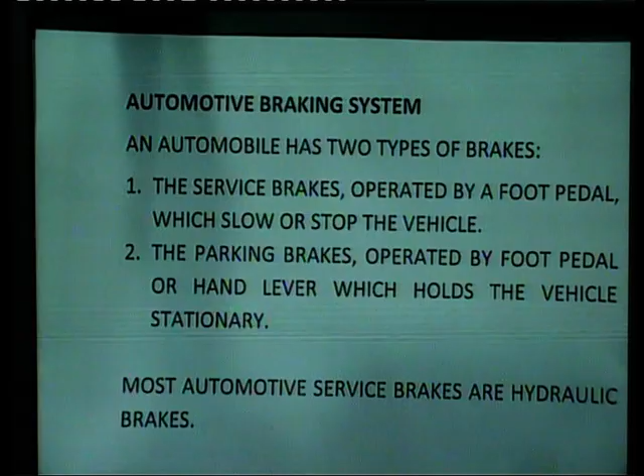Most automotive service brakes are hydraulic brakes. They operate hydraulically by pressure applied through a liquid. The service or foundation brakes on many medium and heavy duty trucks and buses are operated by air pressure, so these are called air brakes.

The hydraulic brake is used on light vehicles, and for heavy vehicles it is air brakes, because liquid is viscous, so it takes time to travel, whereas air under compression behaves like an incompressible liquid. So the air brake is very apt for heavy vehicles.

Now, friction and braking. As you know, friction plays a very vital and important role in braking. If there is no friction, there is no braking. So friction is the resistance to motion between two objects in contact, and it varies with the force applied between the sliding surfaces.

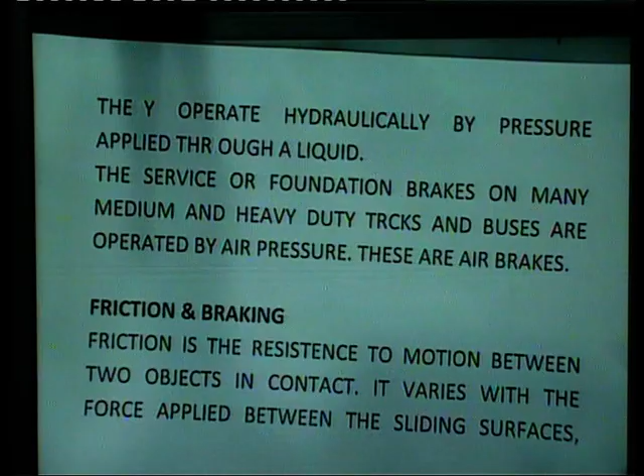The two sliding surfaces mean the brake shoes are stationary, while the brake drum or disc is moving. So the friction between these two is responsible for braking, along with the roughness of the surfaces and the material of which the surfaces are made.

So friction depends on the roughness and the material. The amount of friction also depends on whether a liquid such as oil is between the surfaces to provide lubrication.

Sometimes the brake is leaky, or the hydraulic oil leaks out through the wheel cylinder, and the brake shoes get wet. This liquid acts as a lubricant, which decreases friction and hence braking.

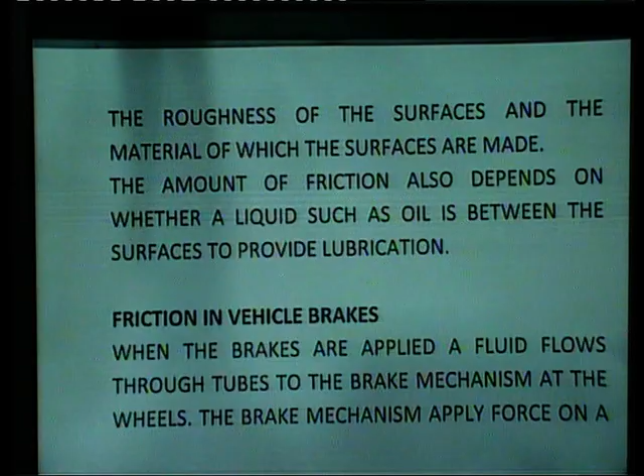Friction in vehicle brakes: when the brakes are applied, fluid flows through tubes, which are pipes connecting the master cylinder to the wheel cylinder, to the brake mechanisms at the wheels. The brake mechanism applies force on a rotating part, so the wheels are slowed or stopped.

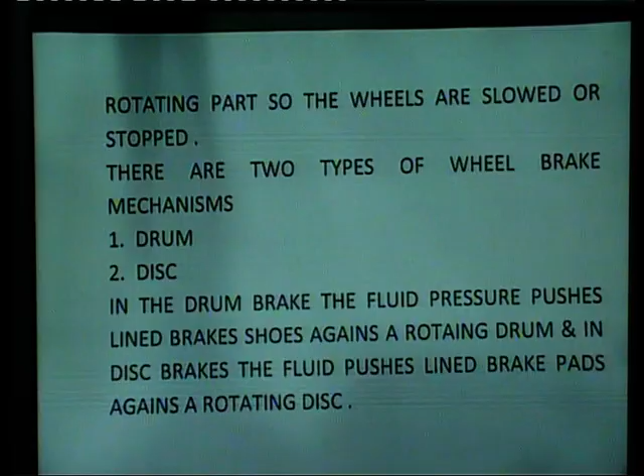There are two types of wheel brake mechanisms: drum and disc. In drum brakes, fluid pressure pushes lined brake shoes against a rotating drum, and in disc brakes the fluid pushes lined brake pads against a rotating disc. The friction between the stationary shoes or pads and the rotating drum or disc produces the braking action.

So you can see the friction is responsible for braking; it is the friction between the brake shoes and pads that is responsible. Then friction between tires and road slows and stops the vehicle. Since static friction is greater than kinetic friction, the vehicle stops in a shorter distance.

If the wheels do not lock, the brakes must be applied to the point at which the wheels are almost ready to lock. This is the principle of the anti-lock braking system.

Now let me clarify this point. As we know about friction, there is static friction and dynamic friction. Static friction is always more than dynamic friction. Now, if the wheel gets locked, then dynamic friction comes into play.

We want to stop the vehicle as early as possible, in the shortest distance. Hence, the principle of static friction has to be applied using advanced mechanisms called anti-lock braking systems, where the brake pedal is pressed up to the point at which the wheels are almost ready to lock. Only then can static friction be maintained; otherwise dynamic friction comes into play and the vehicle travels a larger distance than with static friction.

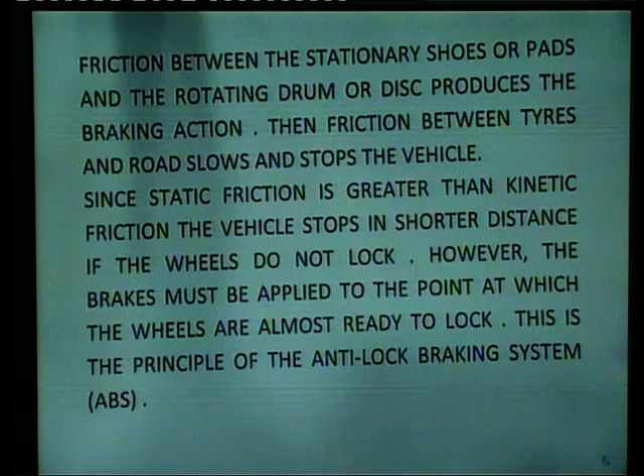Now, why do we use this static friction? Because it prevents wheel lockup. The ABS brake prevents wheel lockup and tire skidding during hard braking.

What is hydraulics? We use hydraulic brakes in automobile engineering. So let us see what is hydraulics. Hydraulics is the use of liquid under pressure to transfer force or motion, or to increase an applied force.

Hydraulics is the liquid which is the medium that multiplies our applied force. If a driver depresses a pedal with 10 Newton force, with the use of hydraulics it can be multiplied by 3 times or 4 times or many times.

The pressure on a liquid is called hydraulic pressure. It is the hydraulic pressure that forces the brake shoes into contact with the rotating drum to produce braking. The liquid travels from the master cylinder to the wheel cylinder through tubes that force the brake shoes to make contact with the rotating drum or disc.

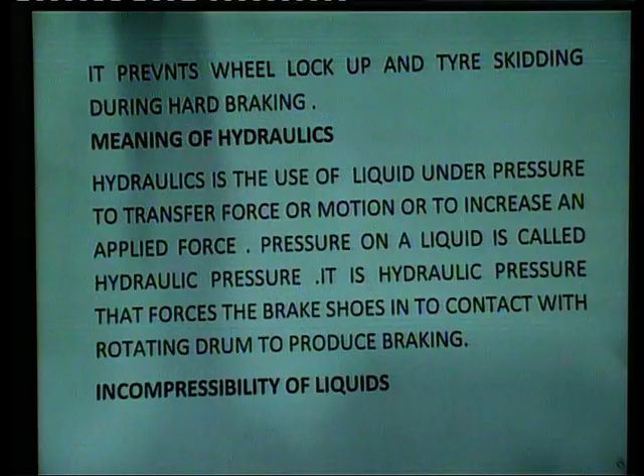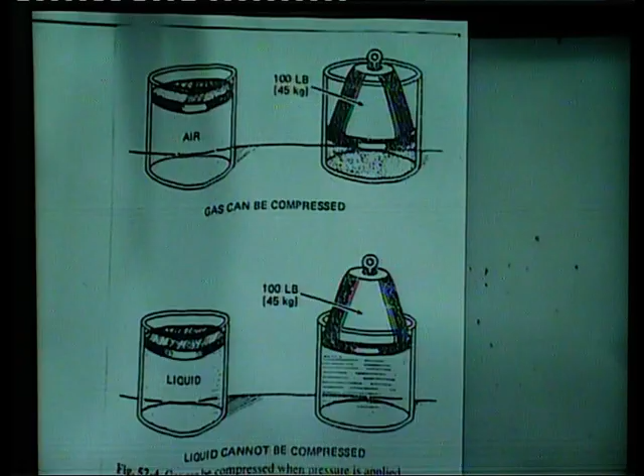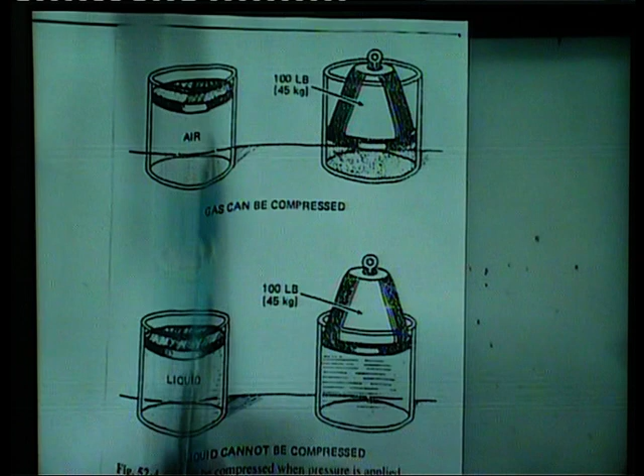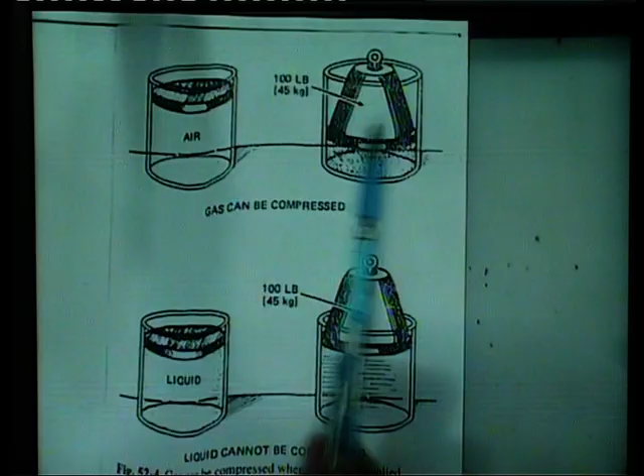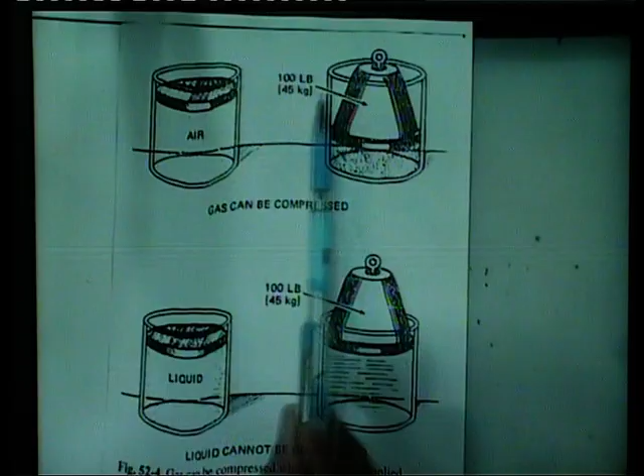Take this first case - the weight is put on the cylinder which is filled with air. When a weight of 100 pound or 45 kg has been put on this, it will compress this air to a smaller volume. Hence the volume is reduced, and the load will travel from this place to this place.

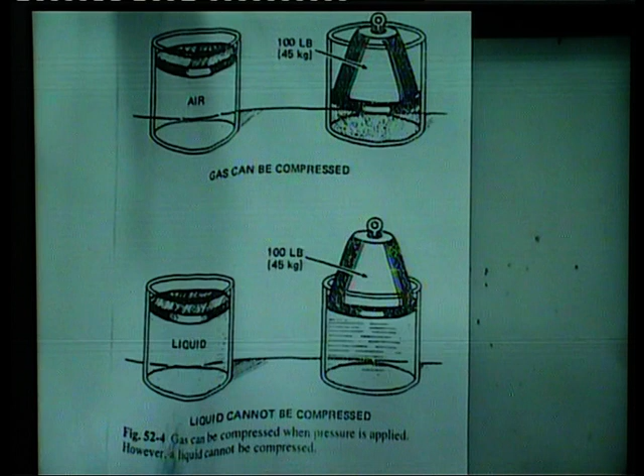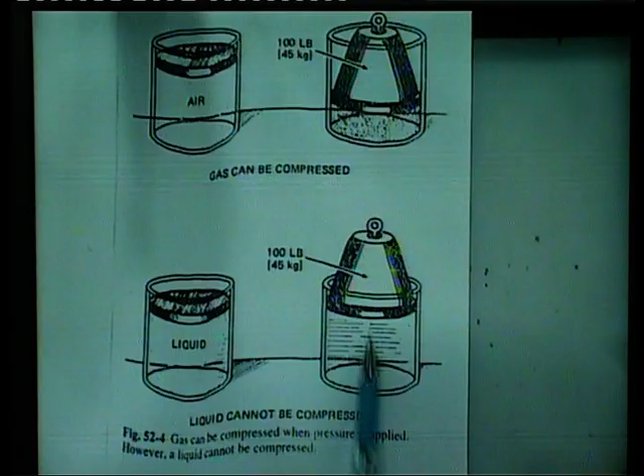See the liquid case - here it is a liquid, this jar is filled with liquid up to this level, then the same weight is applied over here, and the weight does not move downward. So that means the volume of the liquid in the first position remains the same as in the second position.

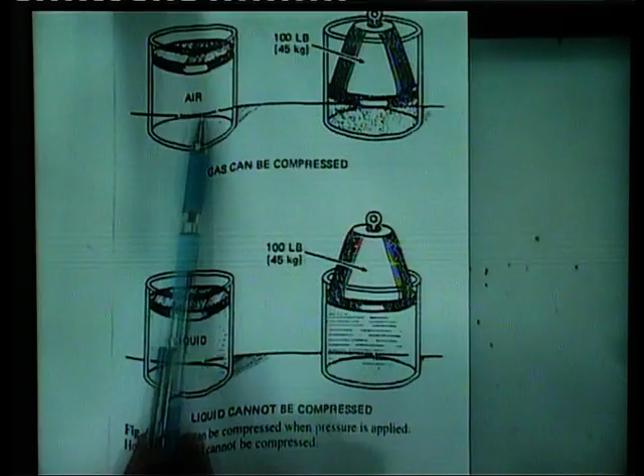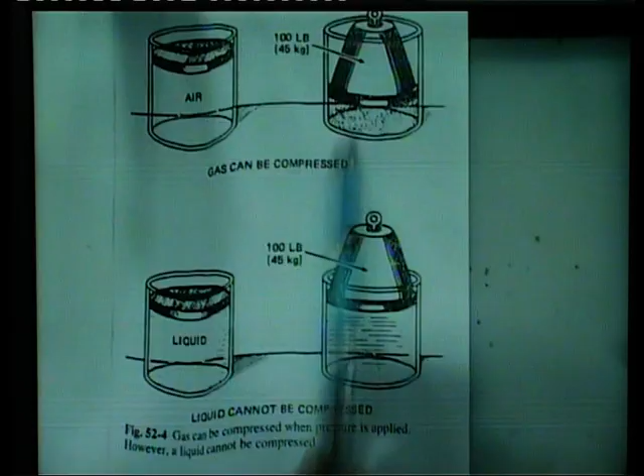So see the comparison from first case to second case - air is compressible. Earlier the volume was so much, now the volume has been reduced to the minimum possible. You can say the air is compressed and the volume is reduced, and in this case liquid is incompressible and no volume is reduced. That is why we use liquid instead of air.

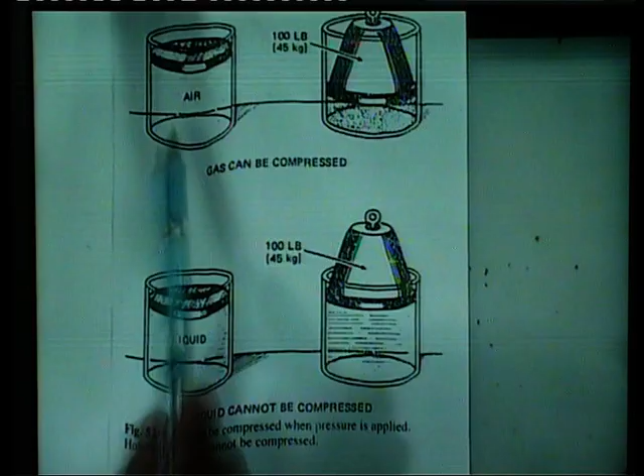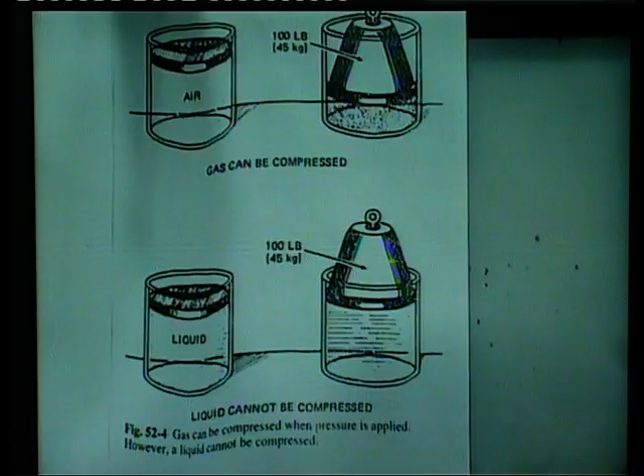Though we are using air brakes, that air is not in this form - that air is in compressed form, and the compressed air behaves like a liquid. It flows instantly and offers no resistance to flow, which is viscosity.

Now we are discussing about the incompressibility of liquids. Increasing the pressure on a gas, as you have seen just now, will compress it into a smaller volume. However, increasing the pressure on a liquid will not compress it. The liquid is incompressible - that makes it possible to transmit force or motion.

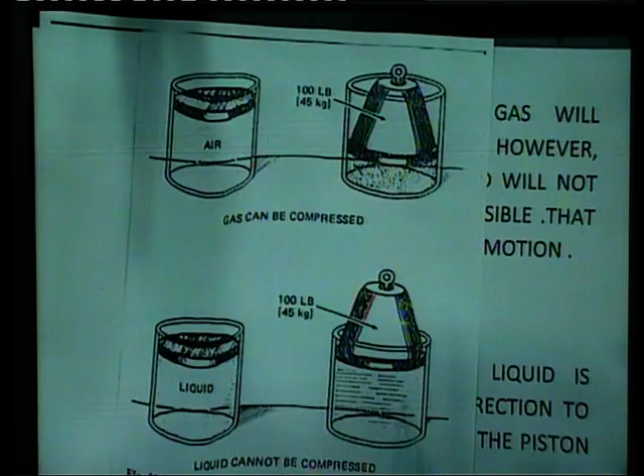I think it is quite clear from the figure previously shown. See it again - the air is compressible, liquids are incompressible. That is why we are using liquids.

Transferring force by a liquid - how are we transferring force through a liquid? The force that is applied to a liquid is transmitted by the liquid in all directions to every part of the liquid. The size of the piston determines pressure - the smaller the piston, the greater the force in the master cylinder.

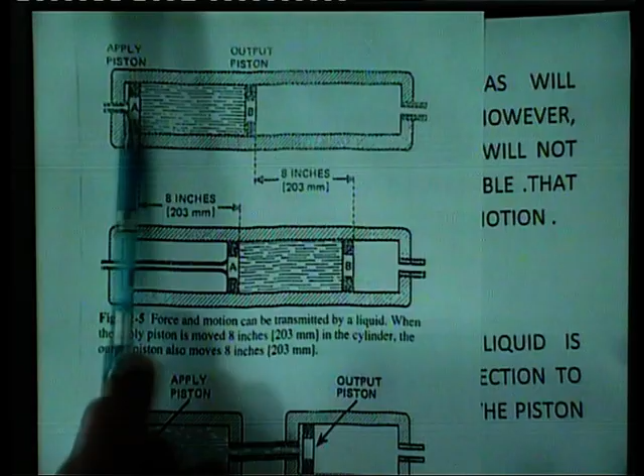See here, in this figure it is clear that we are transferring force. The liquid is filled in this master cylinder, we press this pedal and the piston moves, and the liquid in front of the piston is pushed with a force that is forced through the tubes, and finally it reaches the wheel cylinder that is responsible for braking.

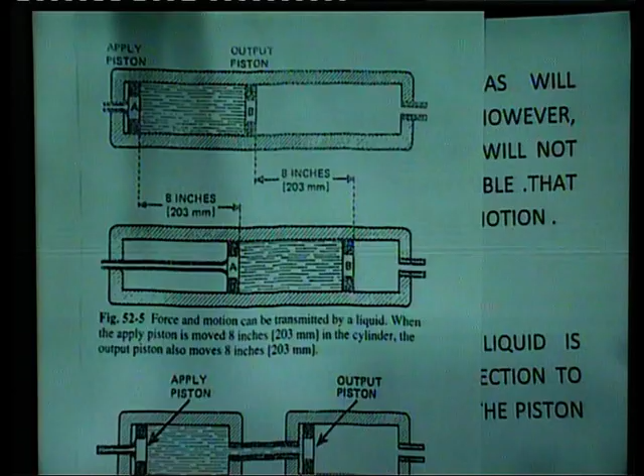As I have told you, the smaller the piston, the greater the force in the master cylinder, and the bigger the output piston or wheel cylinder, the greater the output force. It means the master cylinder area should be smaller than the area of the wheel cylinder.

If the area of the master cylinder is smaller than the wheel cylinder, the greater force would be at the wheels. If the area is doubled in the wheel cylinder, that means we are multiplying force twice. If it is thrice, we are multiplying the force 3 times. That is why the area of the master cylinder is kept smaller than the wheel cylinder or piston.

In case of disc brakes, it is the diameter of the piston, and in case of drum brakes, it is the diameter of the wheel cylinder.

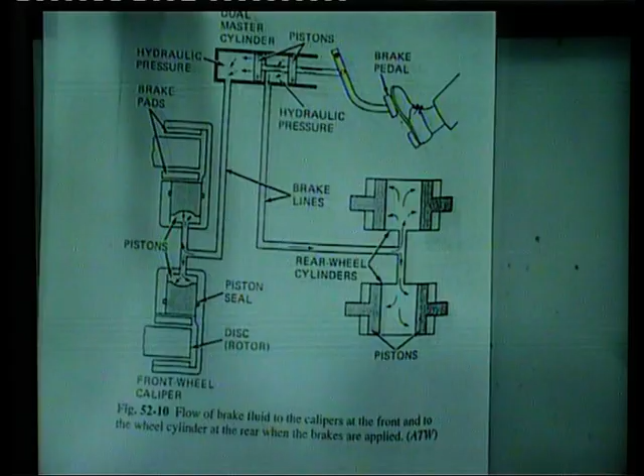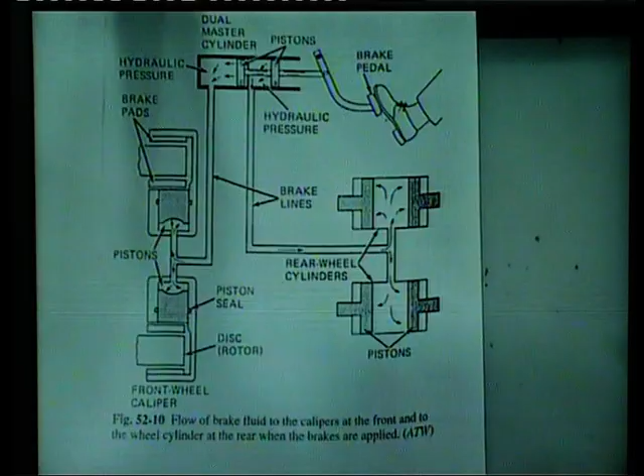Here you can see from the figure how the brakes work. This is the master cylinder. When a driver pushes the brake pedal, it moves the piston from this position to the forward position, and the liquid in front of the piston gets compressed and flows through the tubes to the front wheels and to the rear wheels. The arrangement is different for different vehicles, but this is the general arrangement I have shown here.

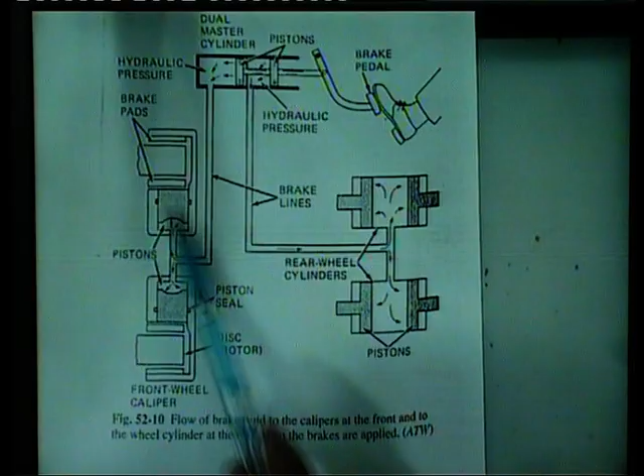When the pedal is pressed, the liquid travels from the master cylinder to the wheel cylinders. These are the front wheels and these are the pistons, and it pushes the pistons outward, and with the help of the calipers, the disc pads come into contact with the brake discs that applies the brake.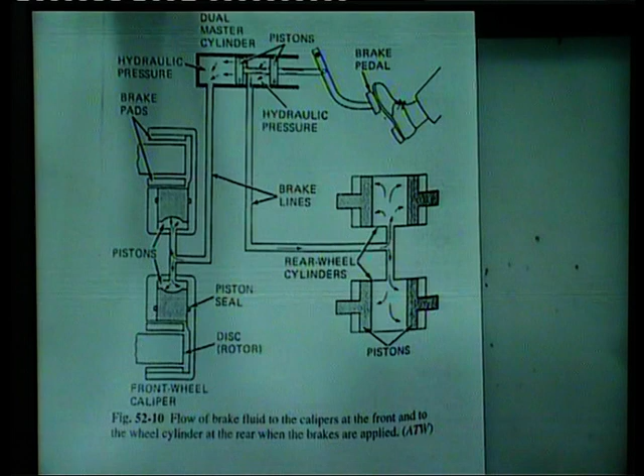Similarly, it goes to the rear wheels where there are two pistons. It expands the pistons and moves them outward, expanding the brake shoes that applies the brake.

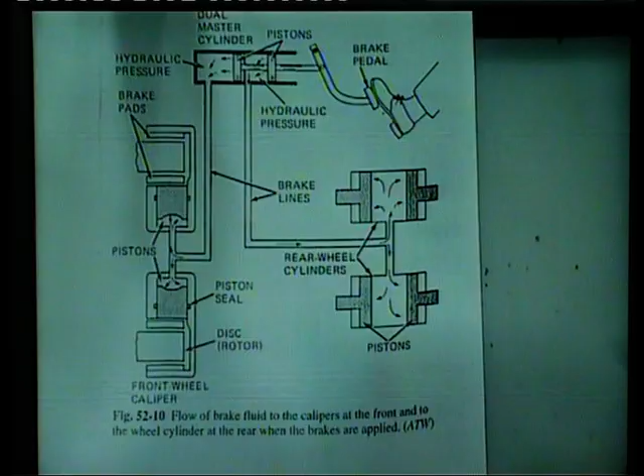So braking begins at the brake pedal, forcing brake fluid from the master cylinder into the lines of the wheel brakes. As hydraulic pressure increases, brakes are forced against the rotating drums, and the resulting friction slows or stops the vehicle.

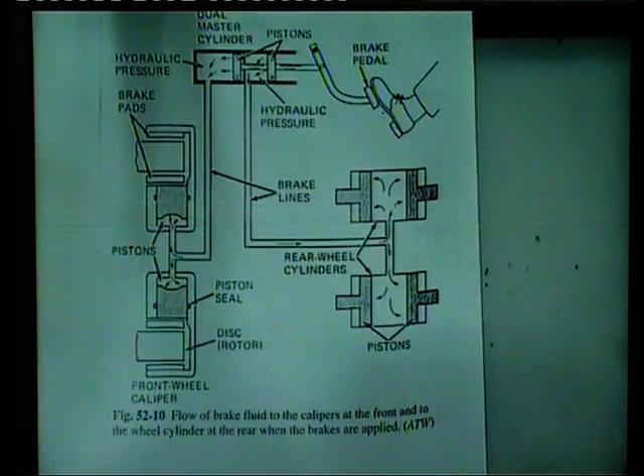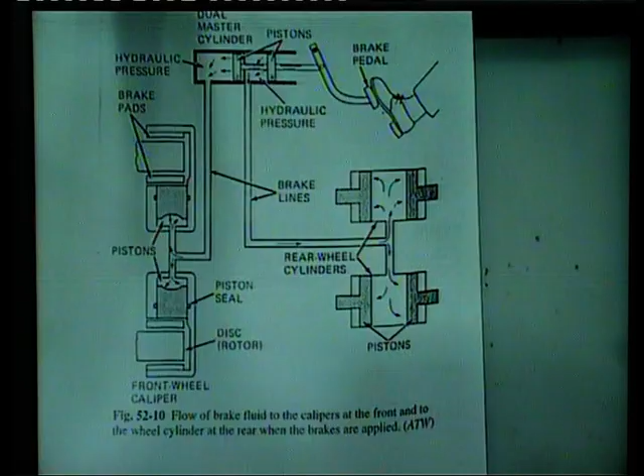Next is the dual braking system. What is a dual braking system? In a dual braking system, the hydraulic system has a primary section and a secondary section. The primary section is always closest to the firewall. However, the dual braking system is hydraulically separated.

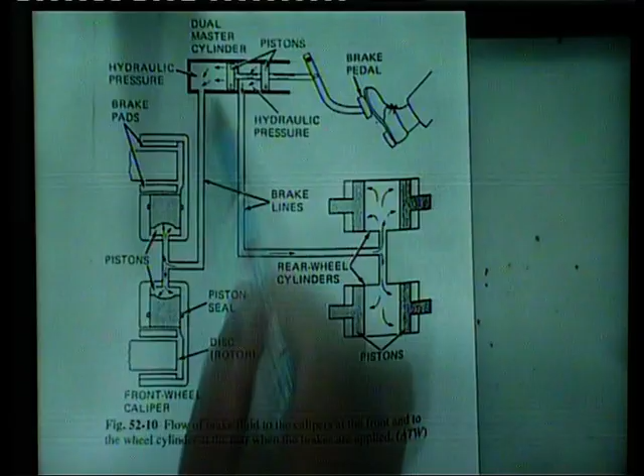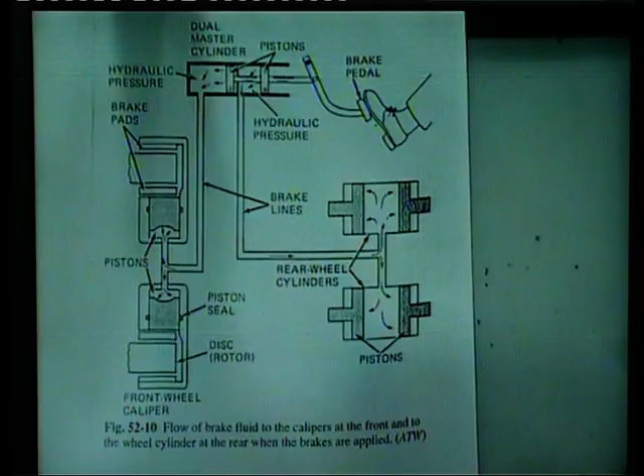Most vehicles with rear wheel drive use the front-rear split, as shown in the figure. These are the two pistons: this is the primary section, this is the secondary section, and it is near the firewall. This controls the front wheel, this controls the secondary. So the primary section is always closest to the firewall, and the dual braking system is hydraulically separate.

Vehicles equipped with rear wheel drive are separated as front and rear split. So this system is for rear wheel drive.

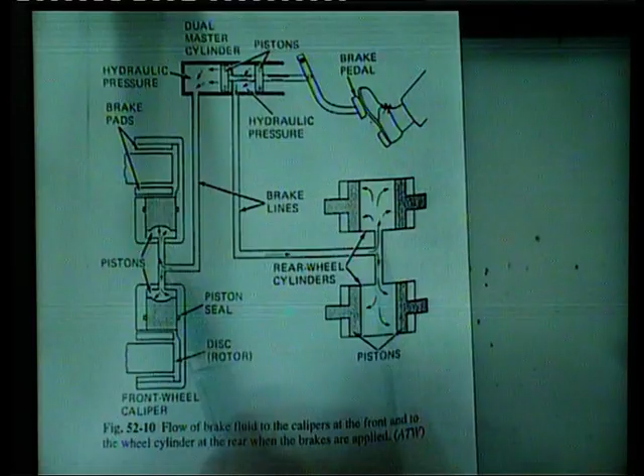Many front wheel drive vehicles use the diagonal split. This means the front right wheel and the rear left wheel are controlled by a single line, and the front left wheel and the rear right wheel are controlled by another line, to make the brake effective in case of failures.

By doing so, one section will continue to work and stop the vehicle if the other section leaks or fails. We are using two systems, the primary and the secondary, both separated, so it rarely happens that the brakes will fail completely. One section will remain working and will not fail. It is almost impossible that all the wheels leak at the same time, so one wheel may leak while the other section of the brakes remains working.

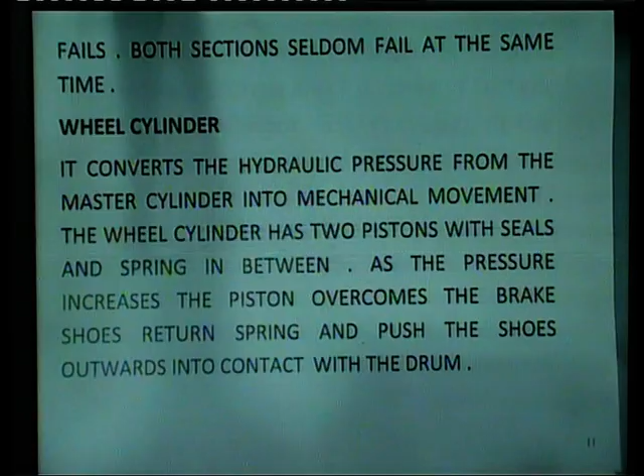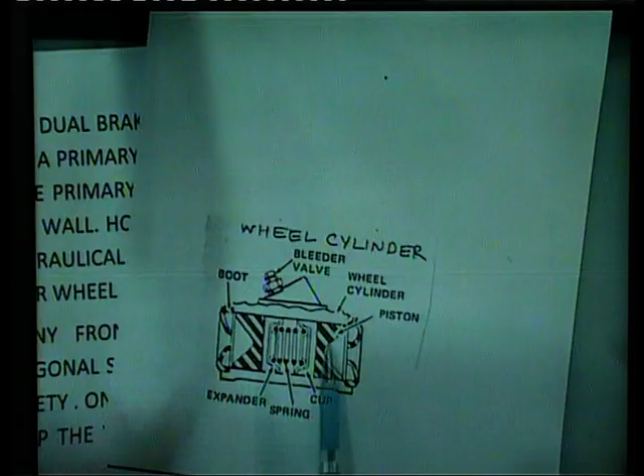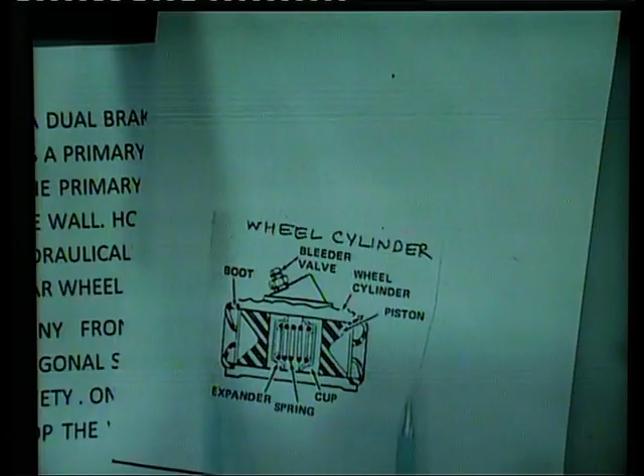This is a wheel cylinder. The pressure comes into this cylinder, and these are the two pistons, both expanding outwardly like this. This piston moves in this direction, this one moves in this direction, and it opens up the brake shoes. Here is a spring which is called the expander.

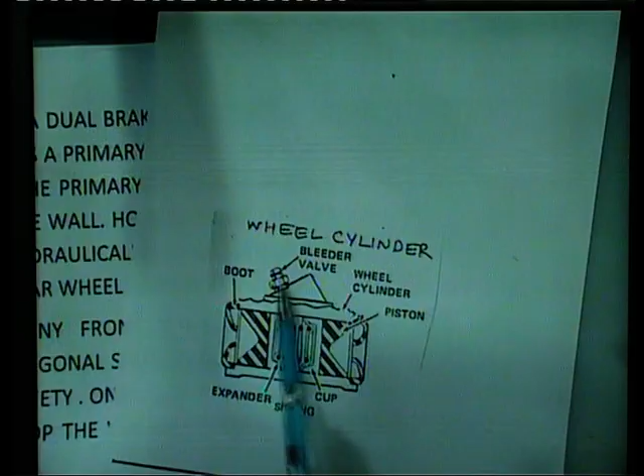The fluid pressure goes against the spring force. This spring force is responsible for the retraction of the wheel cylinders. So, these are the boots which are called seals here, and this is a bleeder valve. In case air gets into the brake system, it has to be bled out, so this is a point from where air can be removed.

So, you can see the wheel cylinder details. It is very simple in construction, but the working is marvelous.

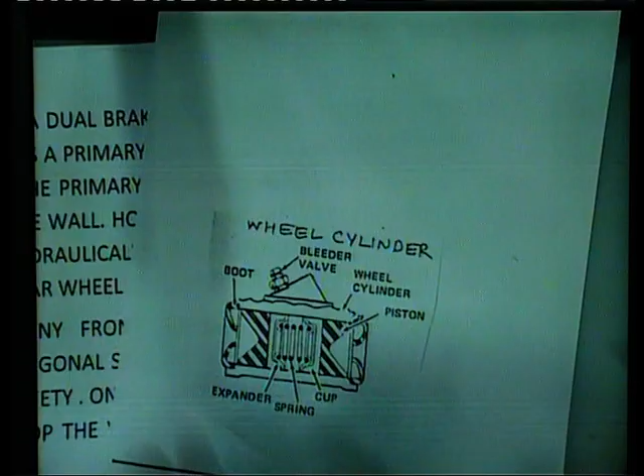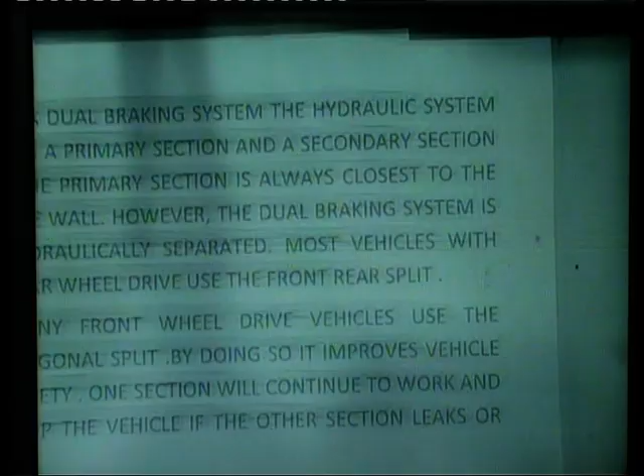Then how does the drum brake operate. There are two types of drum brakes: leading-trailing, or non-servo brake, used on the car wheels of many front wheel drive vehicles, and the rear drive vehicles usually have duo servo rear brakes. In duo servo brakes, the action of one shoe reinforces the action of the other shoe. In a leading-trailing brake, the action of one shoe does not affect the other.

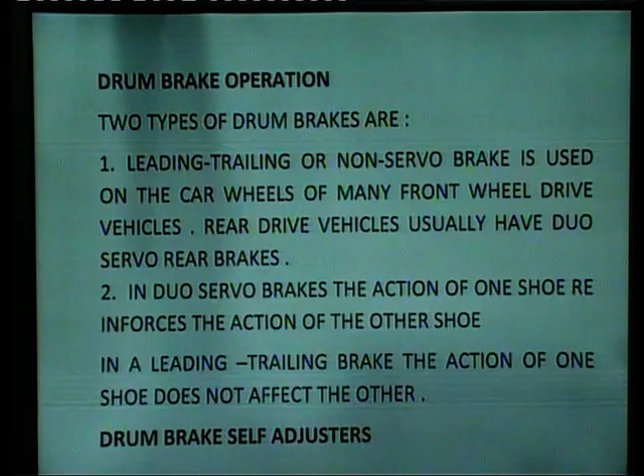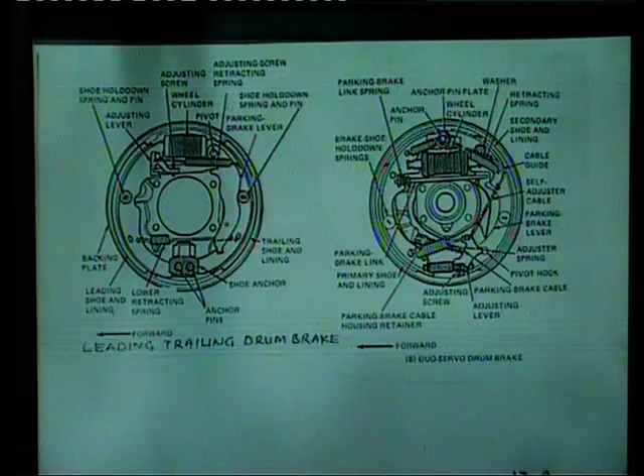See here, this figure shows the leading-trailing drum brake and the duo servo drum brake. This is a leading-trailing drum brake. Usually we are using this system, and in this system these are the brake shoes, wheel cylinder, and here it is a retracting spring that brings back the brake shoes to its original position.

And here this is a brake adjuster lever where the brake is adjusted automatically. In the older days, due to wear of the brake shoes, the brake had to be adjusted manually, but nowadays we are using technology in which the brakes are adjusted automatically.

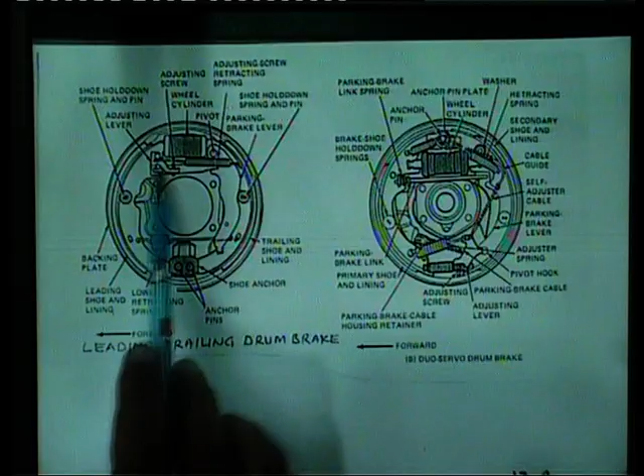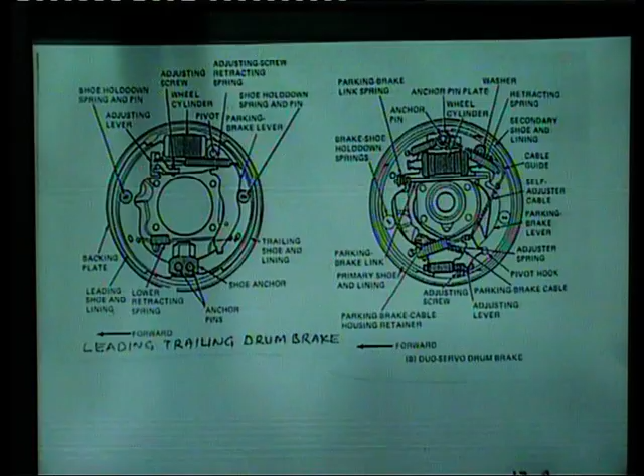This is an adjuster in which there are ratchets. There are many kinds of adjustments. There is a one shot adjustment and there is an incremental mode of adjustment. We will discuss it later. So, usually we use the incremental mode of adjustment. So, the brake pedal does not go down, it is adjusted automatically, the brake shoes are adjusted. This is the adjustment which is in the brakes.

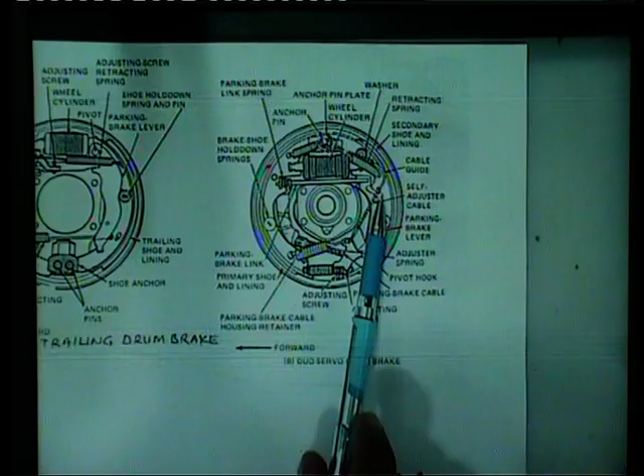And in this system it is a bit more complicated, because the brake of one shoe enforces the brake on the other shoe, whereas in this system both are independent. This is the leading shoe, this is the trailing shoe, and in this system the brakes are applied equally, the force is distributed on both the shoes equally.

So, here are the drum brake self adjusters, as I have shown you in the picture. Most drum brakes self adjust to compensate for lining wear, because we are using the brakes very regularly, so there is lining wear of the shoes, that is why it has to be adjusted. This prevents the brake pedal from getting lower and lower during normal use.

Two types of self adjusters used in the leading-trailing brakes are the one shot and the incremental. One shot means the brakes are adjusted only once, whereas in the incremental mode it is adjusted every time. There are very small adjustments which continue till the brake shoes are not completely worn out. The one shot makes a single adjustment when the clearance between the lining and drum reaches the preset gap, so then no additional adjustments can be made. The shoes must be replaced and self adjusters reset. So, this is the difference between the one shot and the incremental adjusters.

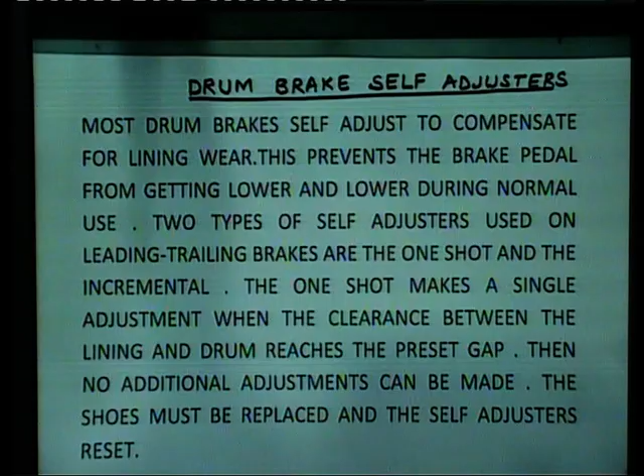Then let us see the disc brakes. Disc brakes have a metal disc or rotor instead of a drum. It uses a pair of flat lined shoes or pads that are forced against the rotating disc to produce braking. The pads are held in a caliper that straddles the disc. The caliper has one or more pistons with a seal and dust boot. The dust boot avoids dust entering into the brake system.